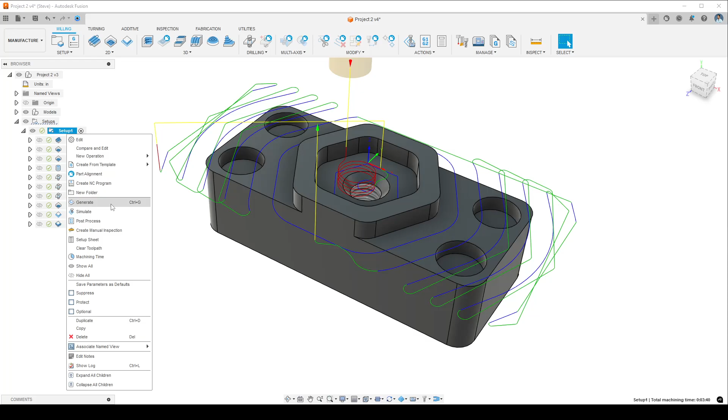Okay, so at the end of setup 1 for Project 2, we created all the toolpaths to machine the top. And if I simulate this and go to the very end of the simulation, we can see where we're at. So we have the part here, all these features are machined, we have a hole that goes all the way through,

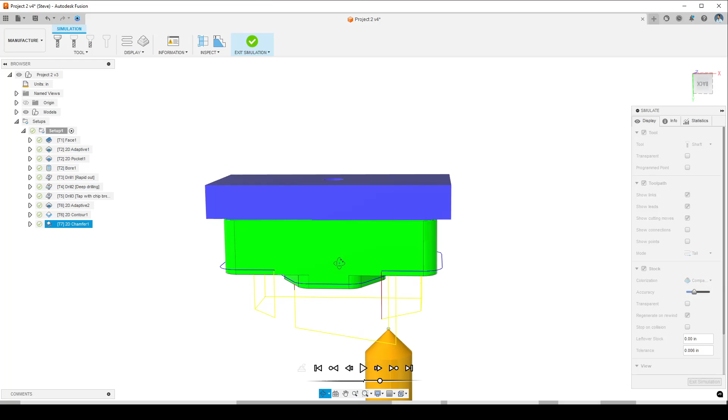but we still have this stock material on the underside, on the bottom side of this model. And we want to remove all of that material and go all the way down to the bottom of the model. There's no extra features on the bottom of this part that we need to align with the features on the top. So we're just going to remove the material, and that's it.

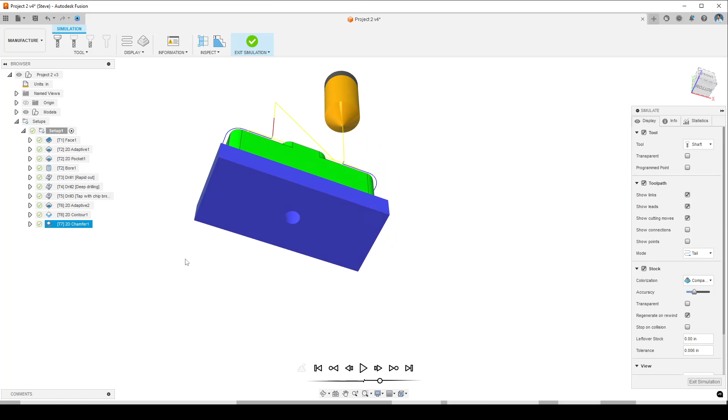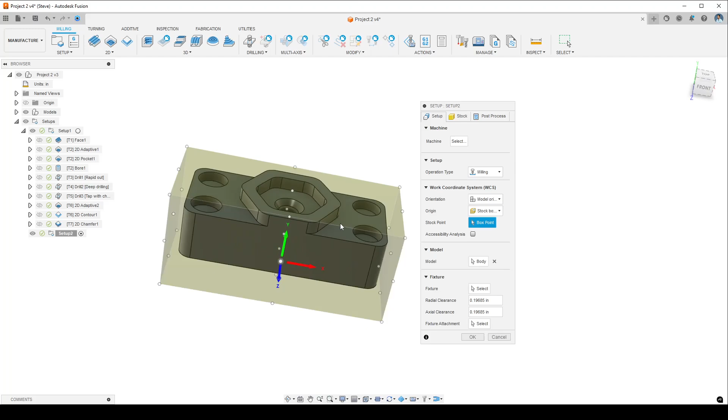In the next project, we're going to machine features on both sides, and that's going to require a third setup, actually. Okay, so I'm going to exit the simulation, and let's go ahead and create our second setup. So I'm just going to go to Setup and New Setup. We see Setup 2 appears down here, and this is our Setup dialog box. So machine, we're going to leave that one empty.

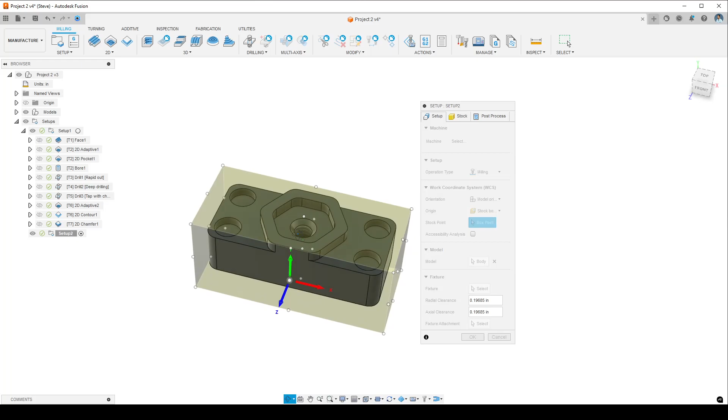Operation type is milling. Orientation, so if we take a look at how this was oriented before, with positive X pointed to the right here, positive Y away from us, and positive Z up, what we want to do is basically flip it over. So we're going to flip it away from us. And now I have a new up direction, right?

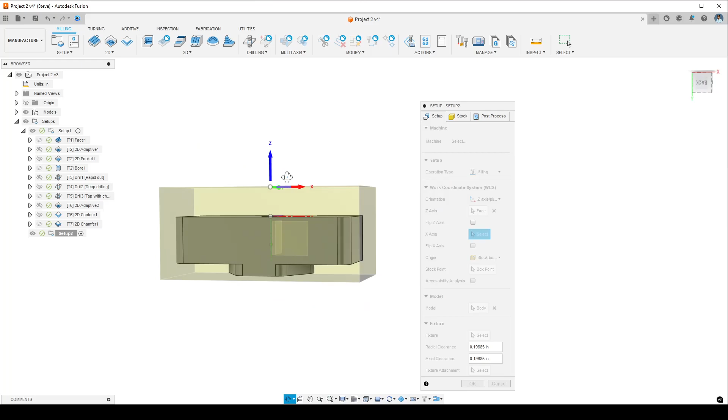So I'm going to change orientation to Z-axis plane and X-axis. And I'm going to click the top surface here, which was actually the bottom surface, which is now the top surface of this model. And I see Z points straight up. And so that is the new orientation. And the X is pointed to the right here, and Y is pointed away from us.

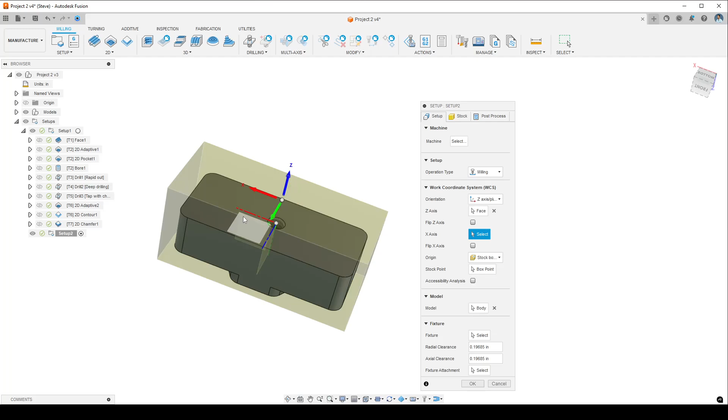Because this object is symmetric across the YZ plane, I guess it is, it doesn't matter if it's oriented like this or oriented like this. It's going to be the same. But if your part is not symmetric in that direction, then the way that you flip it and the orientation of the axis here is really going to make a difference. If you do it incorrectly, you may get features on one side that should be on the other side.

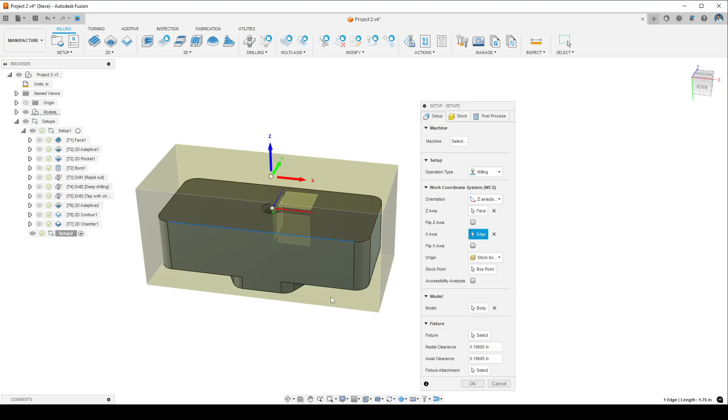Okay, but for now it looks good, and it's asking us to define X-axis. It's already in the right direction, so we can leave that. You could click align, and it would just define it more clearly. And then the next thing for origin, click on box point next to stock point, and then you click where here on the stock you want to set your work coordinate system origin.

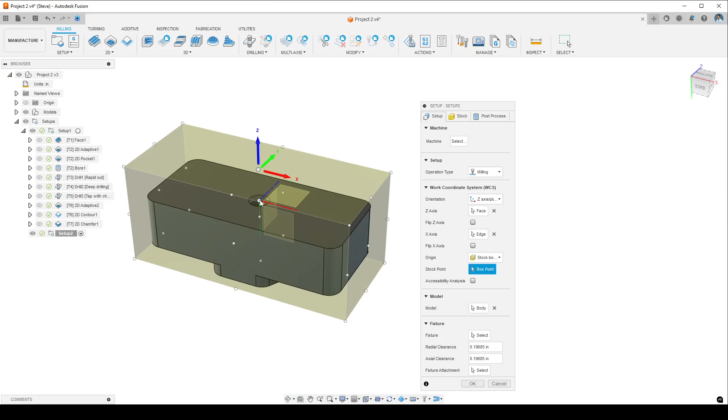And it really depends on what your machine's capable of doing. If you have a probe on your machine that can find the center, or if you have an edge finder that can find the edge, or maybe your probe can only find the edge. It really depends. I know that the machine I'm going to use can find the center top of my model, so I will put it there.

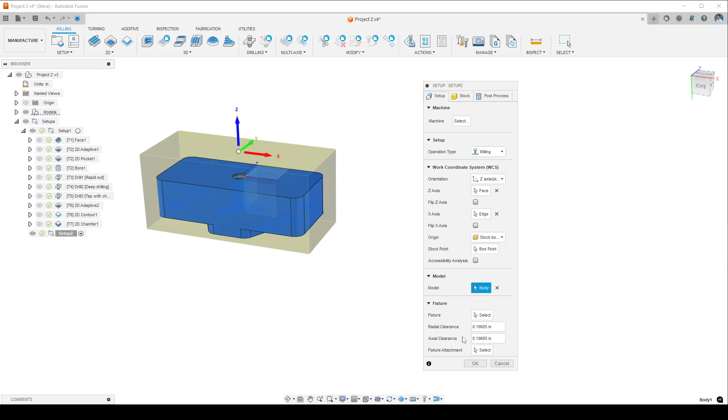And for model, we click on body. It should already be selected there. If it's not, make sure you specify that one body as the model. Fixture, I'm going to leave that empty there. That's if you have a vise or other work holding that you want to define. But we don't have any work holding in our model here.

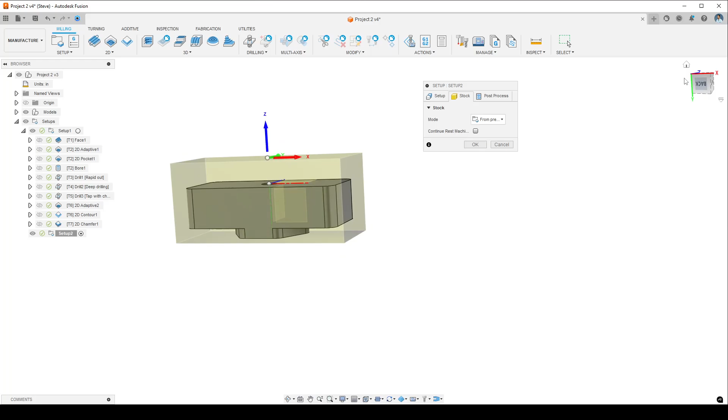Okay, in the stock tab, for mode, this is nice, from preceding setup, which is the default when you create multiple setups. So that means that the position of the model inside of this stock material and the geometry of the stock material is going to be the same as it was in setup 1, which is exactly what we want. So we'll leave that there.

For post process, program name number, I'm going to call this 2002, which is project 2, setup 2. And I'm going to write that, project 2, setup 2, and then your name.

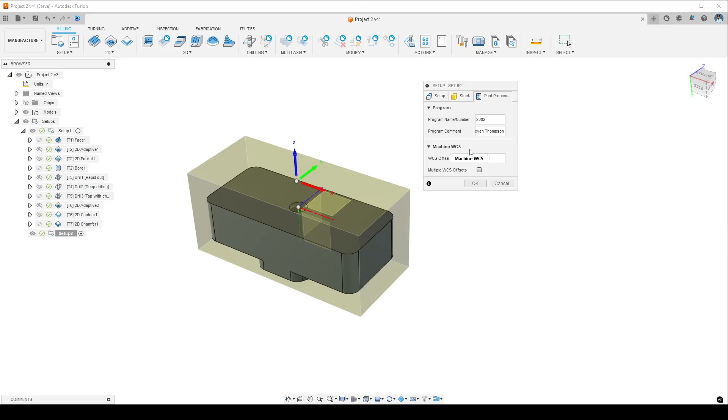Okay, WCS offset, I'm going to leave that as 0. It depends on how your machine expects it to come in. Either 0 is going to default to G54, or you could write 54 in there for G54. And that's the most common. Anything else is a more advanced thing. Okay, go ahead and click OK. And we have our second setup.

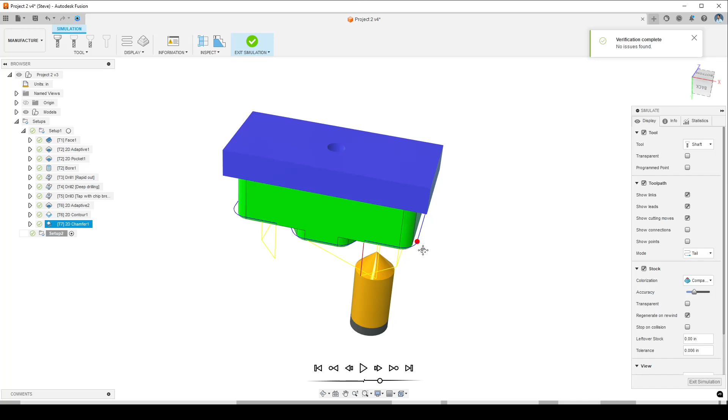Right. Okay, so what do we do? We want to remove this material from the top. Well, I'm going to simulate setup 1 again. Right click setup 1 and simulate. And go to the end. And I can see here we are left with a little bit of material hanging over the side of this part, and then material from the top.

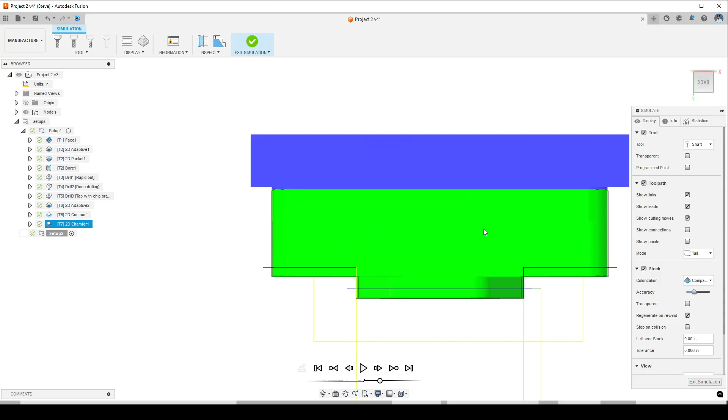Now, it might seem like it would be a good idea to come in with a face mill and machine this down from the top. And for a little bit, that would be okay. But we actually have a really dangerous situation here. It does not seem very dangerous at all, but it is quite dangerous. And that is what is going on right here. So this is known as an overhang.

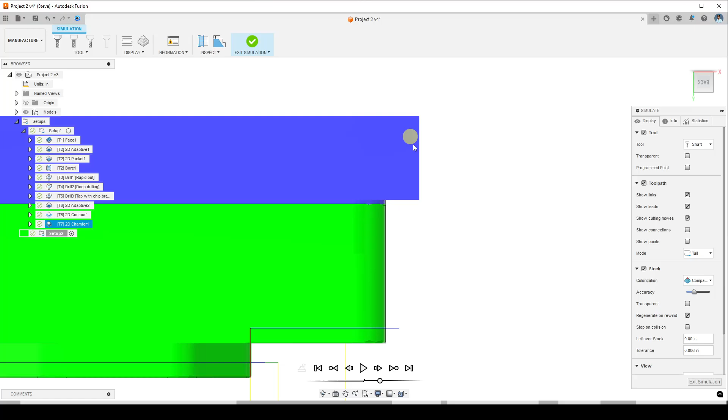An overhang is any unsupported material. And the rule with overhangs is you do not machine on top of overhangs. It could be cantilevered like this, or it could be bridged between two supporting surfaces. In any case, you cannot machine on top of an overhang, because basically the material itself will bend away or deflect away from the tool, and then it'll go back into the tool, and it'll start to vibrate. And it'll make a lot of crazy noise, and it'll basically be colliding with your tool. So you get a terrible surface finish, first of all.

And then it gets really dangerous when the material forces itself into the tool because it's vibrating, and it over-engages with the tool, and it's so thin that the tool can actually rip it a little bit. And it gets caught up in the tool, and the tool can throw it out of the vise and against the side of the machine, or if your machine doesn't have an enclosure, it can throw it across the room. Very dangerous projectile type situation.

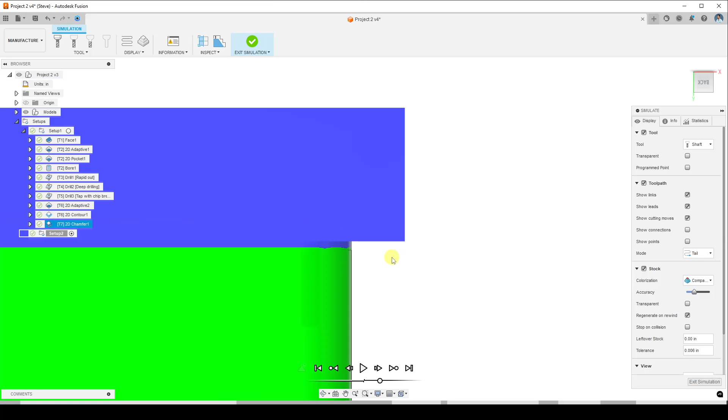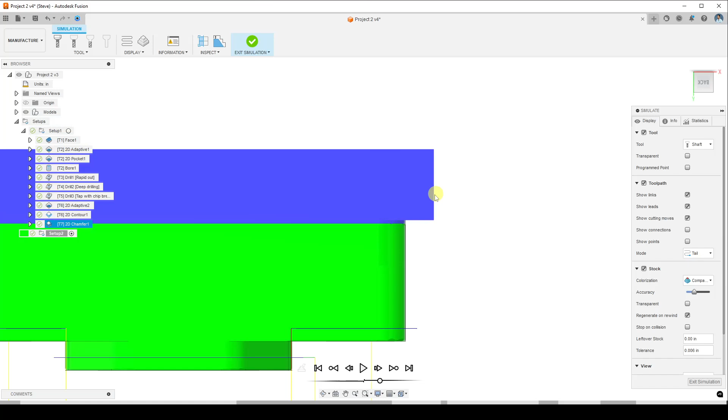Okay. So what do we do? Well, with overhangs we can support them. If it's like a bridge between 2 points, we can support from underneath if we're not going to be machining underneath it. But we want to remove all this material, so we're actually going to come in from the side and do a lateral cut with an end mill, just to remove all this overhang material, and then we'll go in and face the material off with the face mill.

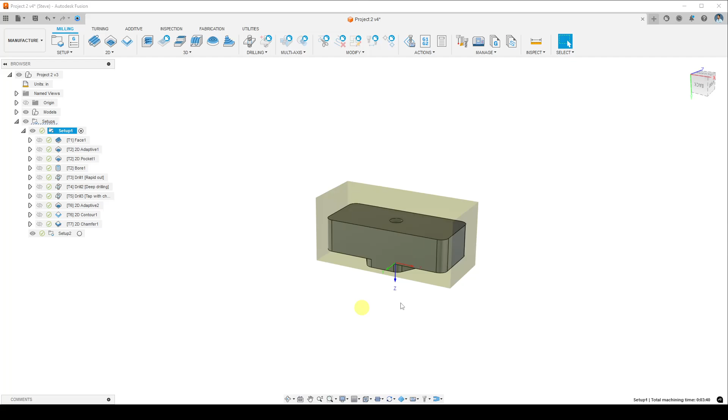Okay. So one thing that's important to note is that now that we have 2 setups, we have what's known as the active setup. So if you see the little dot next to setup, if you click on that dot, it'll activate that setup. What that means is that it's going to show that stock with that work coordinate system. Also, if you add a new toolpath, it'll add it into the active setup. So since we're doing setup 2, we want to activate setup 2.

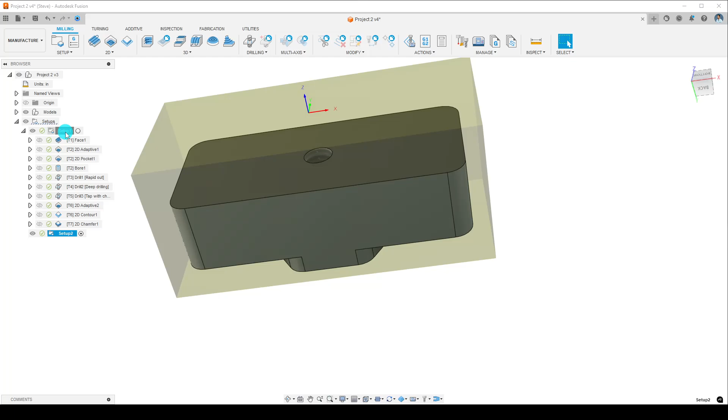Go ahead and click on the button next to setup 2, and we can see that the orientation of the work coordinate system is correct. And yep, setup 2 is the active setup. Great. So first thing we're going to do is an adaptive clearing from around the outside. So I'm going to do 2D adaptive clearing.

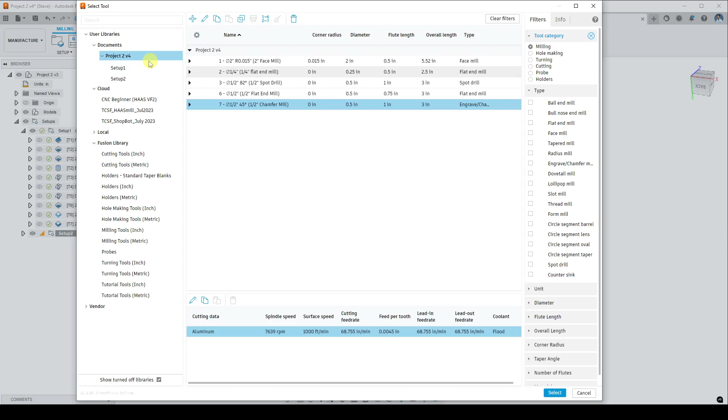For tool, click select, and we can go to our Project 2 document right here, and we can find a tool we've used so far, like a larger end mill, half-inch end mill. Looks good. And click select.

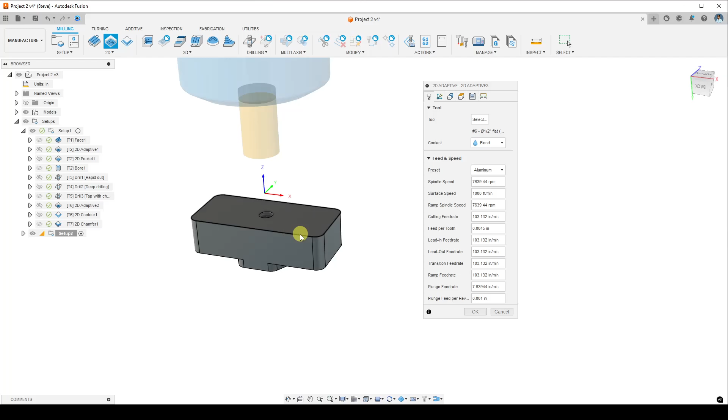Okay, and what we want it to do is to actually machine everything on the outside of this contour. So for geometry, I'm going to select what is now the top outer contour. We can see it shades everything on the outside of that. It's going to remove all the material on the outside.

For heights, we can leave that, and for passes, make sure you check stock to leave. And what that will do is it will leave radial stock and axial stock, so that the tool doesn't get too close to the model. It'll leave a tiny little overhang, but it's not going to be enough to be dangerous. So we'll leave that as is. Go ahead and click OK.

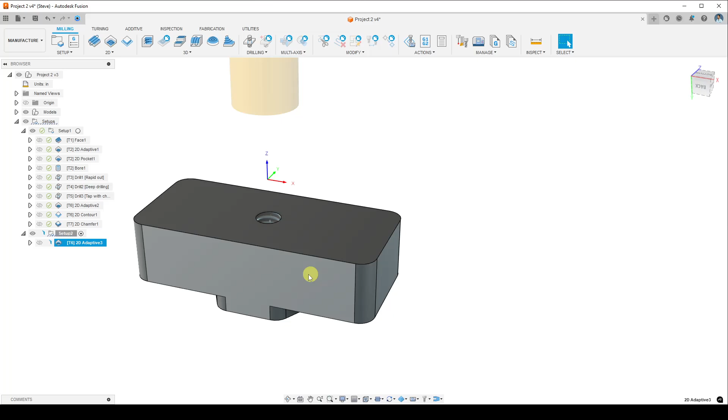And actually, let's go back to that adaptive, and I'm going to edit it. And let's see. One thing we didn't do was in the passes tab, we didn't check the optimal load. So the optimal load is the amount of tool engagement during adaptive toolpaths. And what is a good optimal load?

I'm looking in the book right now, CNC Beginner's Guide. And I have a table at the very end on page 274. And it says a good optimal load for a 1/2 inch diameter tool in aluminum is 0.1348. So I'm going to write that.

0.1348. This is a number that is kind of determined experimentally on a machine, and I know that this works for the machine that I'm using, but it might be too much for the machine that you're using. It depends on the power of the machine, and a few other things, the horsepower of the spindle, stuff like that. Okay, so that looks good. Go ahead and click OK.

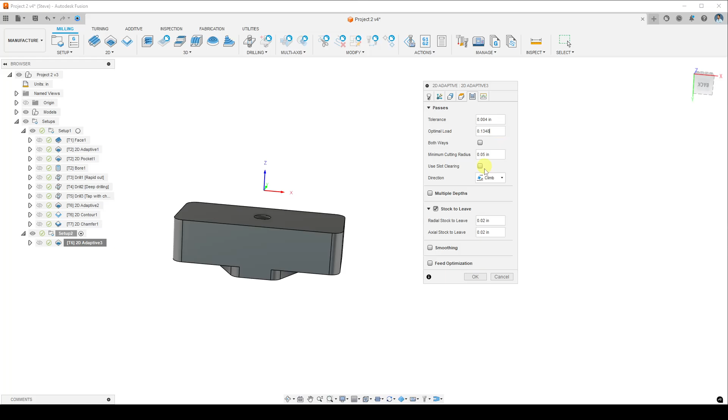And let's take a look. I'm going to right click on setups, both setups, and simulate. And that way it'll show everything from the first setup. I'm just going to click on the adaptive, which is the last one here, and I'm going to click play. I'm going to take a look at this from the side. I want to be sure of something. I want to make sure that we're not machining.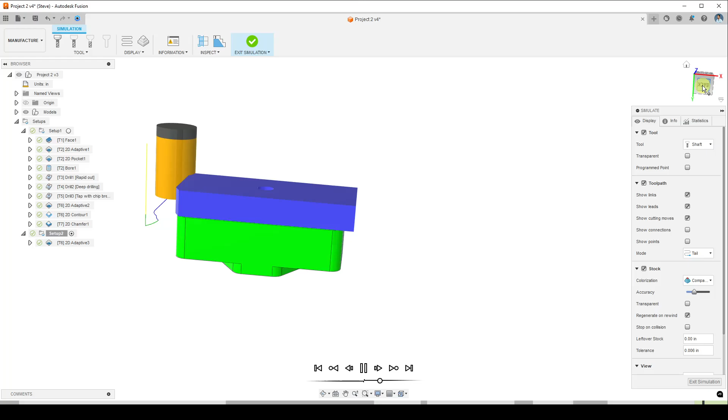Yeah, okay. So one thing I was maybe a little bit worried about was that this tool looks like it's coming right down to the edge of the stock material. That's fine in a digital environment. When you get into the actual world, you might get a little bit of material actually left, like a really thin layer of aluminum, which might also be dangerous. So what we're going to do is make this go a little bit lower.

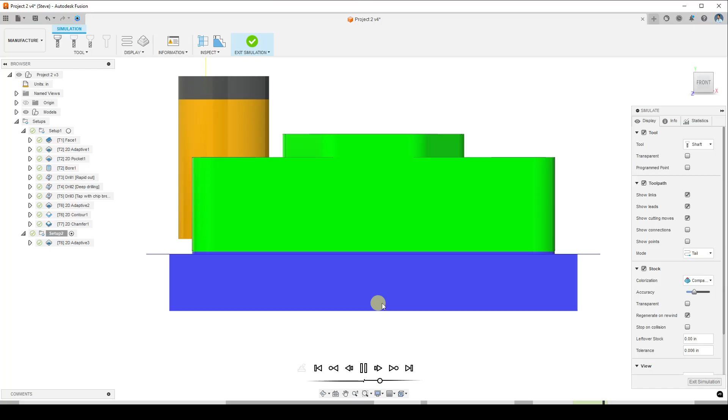And this is about how far the contour went in the first setup. So if we see this, depending on how deep we went here, that determines how much material is left on the other side. So I think that we had a 0.02 height to go below the contour. And if we had a 0.02 radial and axial stock to leave in setup 2, then it's going to be the same position. So I'm going to go a little bit lower here.

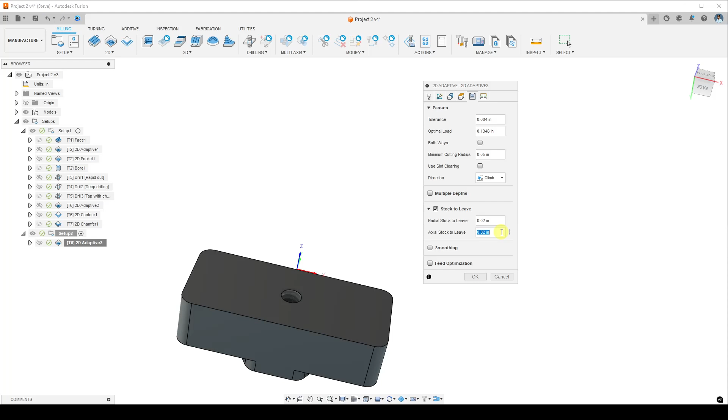So I'm going to go to adaptive 3 and edit it. And in the passes tab under axial stock to leave, I'm going to say 0 and click OK. What that's going to do is it's going to make the toolpath depth go all the way to the bottom of the model, but it's still going to be offset on the sides of the model. So I think it's going to be okay.

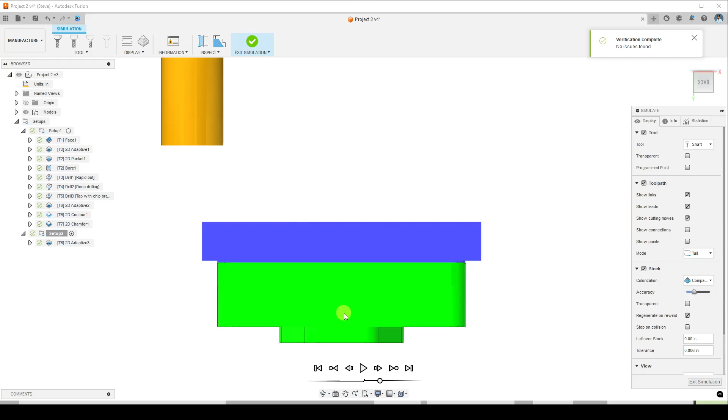Right click setups and simulate, and I'll go down to the bottom one here. And let's see. Yeah, that's good. You see it's machining well below the bottom of the overhang. And we're machining from the side of the overhang. So we don't have to worry about entanglements or part ejections. Okay, that looks pretty good.

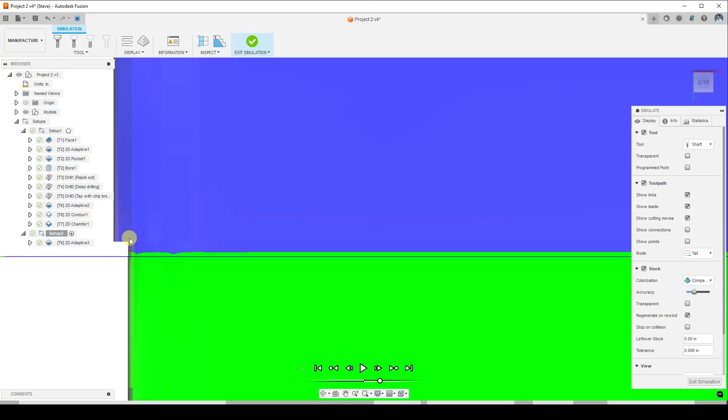So notice we still have a tiny little overhang here, but that's 20 thousandths of an inch, and it's not enough to cause any problem. So we're going to leave that.

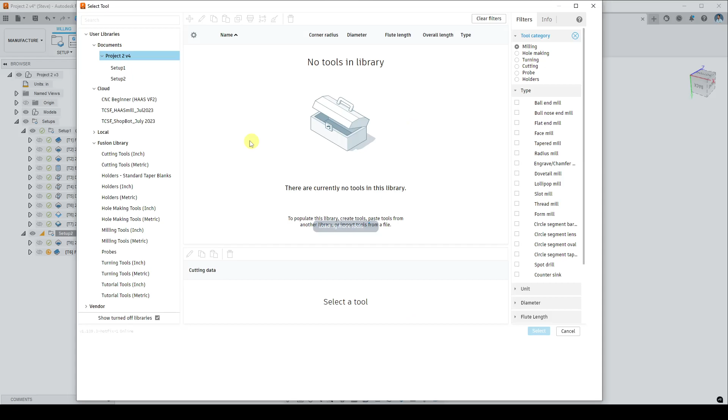And we are going to exit the simulation. The next thing we're going to do is make a facing toolpath and bring the face mill out and get all the material off the back. So I'm going to go to 2D, face. For tool, click select, and we'll find that face mill from setup 1, tool number 1, and click select.

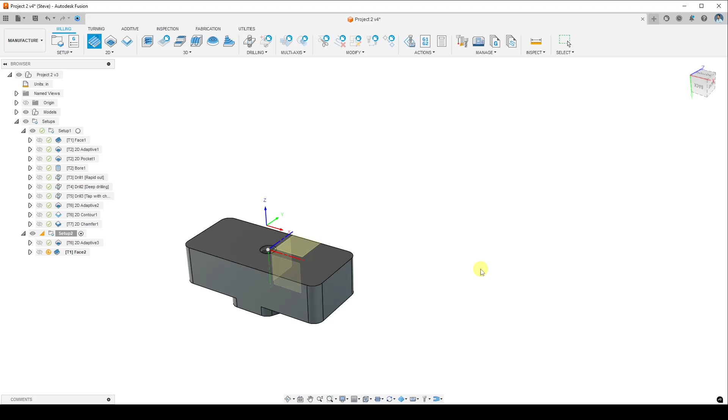Okay, geometry, default is fine for that. Heights, everything's okay. Passes, let's check multiple depths. Actually, let's not check multiple depths and let's see what happens. So go ahead and click OK. Just one pass. I'm going to right click on setups and say simulate. I'm going to go to the last toolpath, the facing toolpath, and it looks okay. I'm not getting any collisions, right?

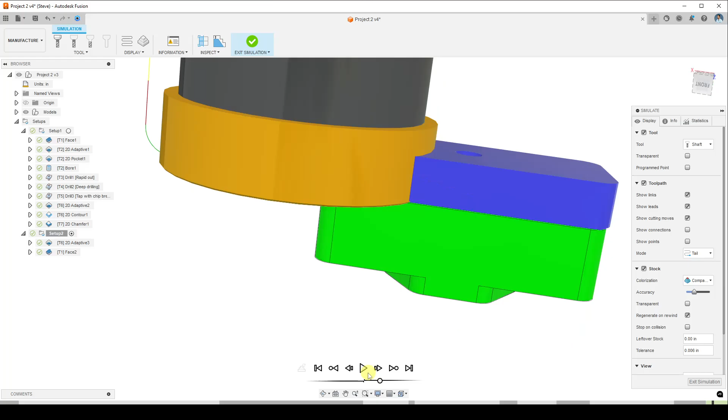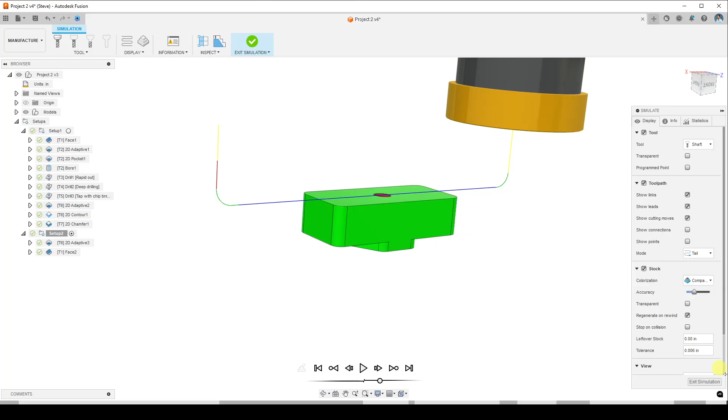But I know from experience that depth of cut is way too much for this face mill into that piece of aluminum. You might get the tool pushing the aluminum out of the vise. You could break some of the teeth on the face mill. There's a lot of really bad things that could happen. So I'm gonna exit the simulation.

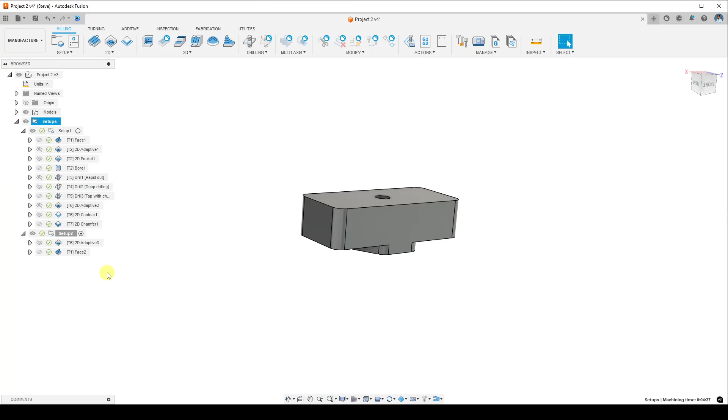Not every tool can do a full step down like that, and especially not the larger diameter tools, because the volume of material that you have to remove when you have a full step over like that, and you're cutting at such a large step down, is too much for the machine. Your spindle might just burn out or just stop. So we're going to back this off a little bit, and the way we're going to do it is we're going to edit that facing operation.

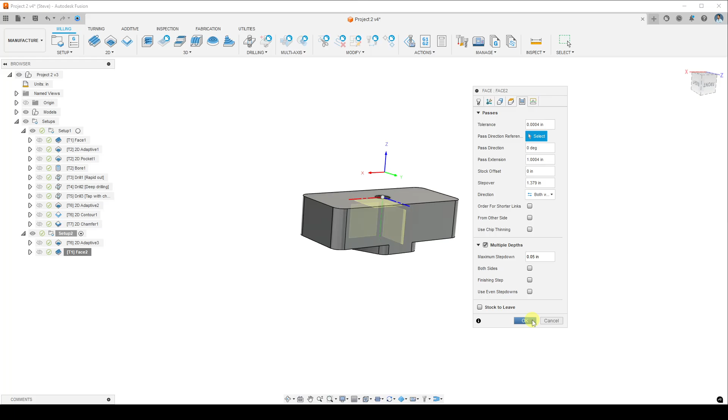I'm going to go to passes, and I'm going to check multiple depths. Now maximum step down for this tool is 0.1, and that's something that we set, I think it's in the table, when we created this tool library in an earlier video. We don't always have to go to the maximum step down, especially because it's a small part. So I'm gonna back it off a little bit. I'm gonna say 0.05. It's not gonna take a lot more time, and I think it's gonna be okay. So go ahead and click OK, and there it is.

So let's give this a try. Right click on setups and simulate. I'm going to skip down to the facing operation, and let's see how we do. Okay, so a nice reasonable amount of material removal. You might be able to get away with a little bit more, but it really depends on your CNC machine and what it's capable of doing. So yeah, there we go.

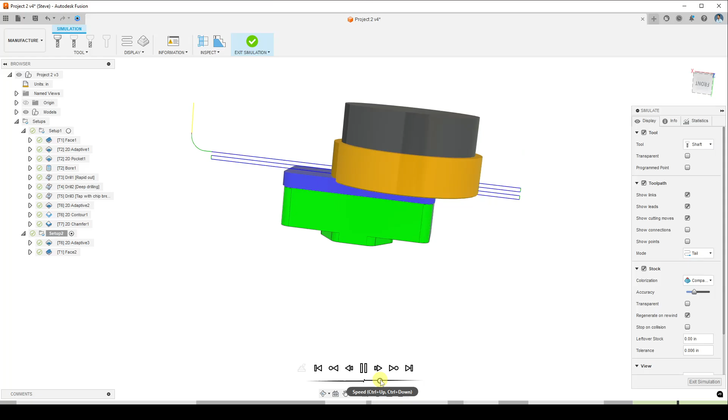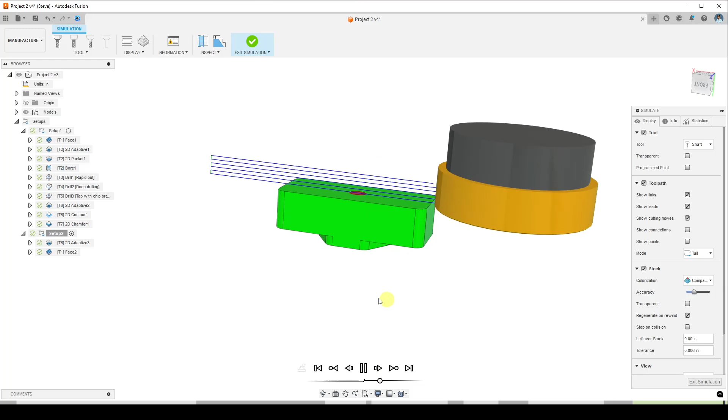Multiple step downs is a really common thing to do. It's a really common way to reduce the forces on the tool and on the machine, and to manage the volume of material removal. You can step it back by creating step downs of different sizes. Okay, last one. And there we go. Okay, so that's it. We have machined all the material all the way around our part, and yeah, that looks good.

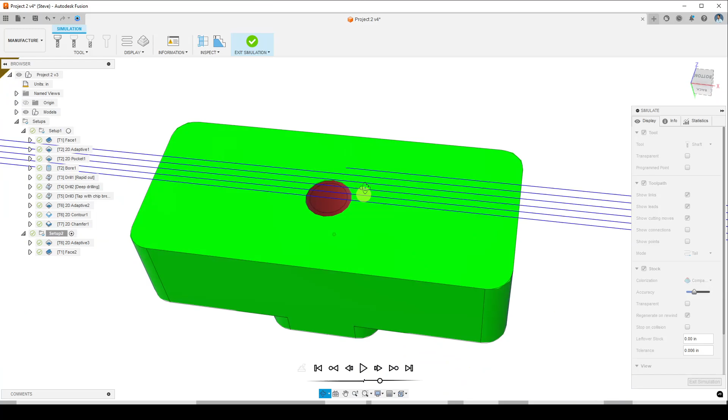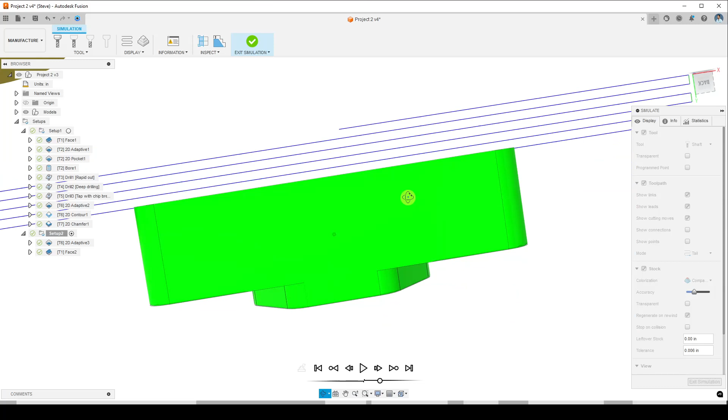We are not going to actually machine any other features on the bottom of this, so we're going to end it there. In the next project 3, we're actually going to match features that we machine on the top to the bottom, and that's going to require a third setup. We have to bring the probe out again a third time and make a new work coordinate system, and we're going to have to redefine it so that we can align the machining from the previous setups with the machining that happens in the later setups.

So it's a bit tricky. It's different most times. Sometimes it stays the same, but we'll do it a couple different ways throughout the course of this series. Okay, so that is it for Project 2 Setup 2.

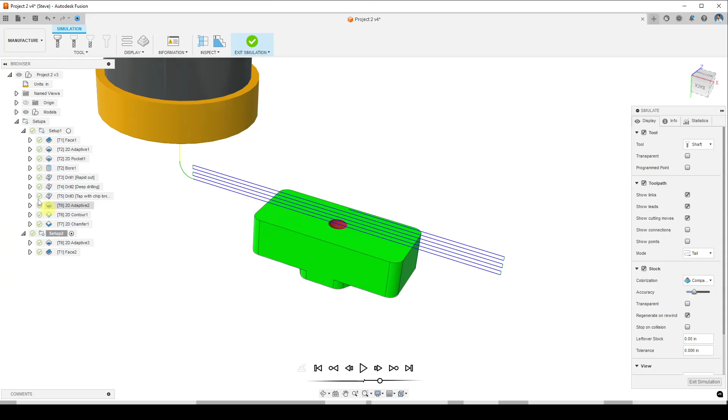Go ahead and check out the next video. We're going to go over creating setup sheets, machining notes, and post-processing G-code for Project 2. So I will see you there.